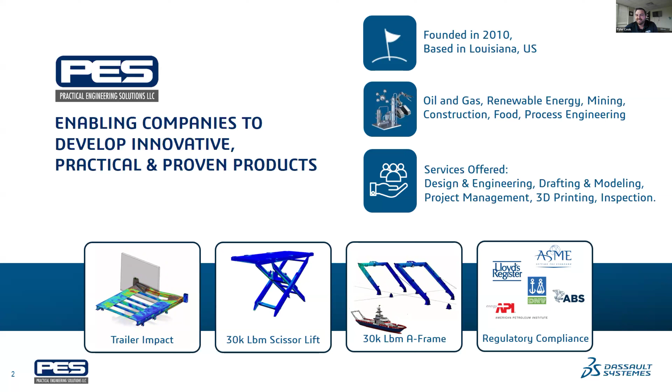Pretty excited to talk about those that are on the screen right now. Maybe we can take a step back and tell us about the history of PES. How did you guys start? How did you grow the business?

This company was founded by our founder, Clayton George. He's a PE as well, really we're 100% focused in the oil and gas industry. Clayton has a ton of experience doing basket design, pressure vessels, portable accommodation modules as well, a lot of stuff that's really big in the oil and gas space. As his company started to grow, he needed to come out with new ways of making sure everything was getting done when they needed to.

So you'll see there, we have a proprietary automated workflow system that we use. It helps all of our project managers stay up to date on their projects, the team understands when their deliveries are, and it really did kind of shape this company into what it is today. This company really is built on clear communication, and if we can communicate clearly internally and create tools that communicate externally to our clients, we've found a lot of success in just really clear and concise communication.

I started here in 2020, so in one of the worst economic years to date. I worked at Stonewall Engineering, another consulting firm, and we were competing against PES. In 2020, both companies were in the same situation—a lot of the oil field work dried up just like everything else, and so both companies were in an adapt or die scenario. That's a little bit dramatic, but that's the reality of where we were back then.

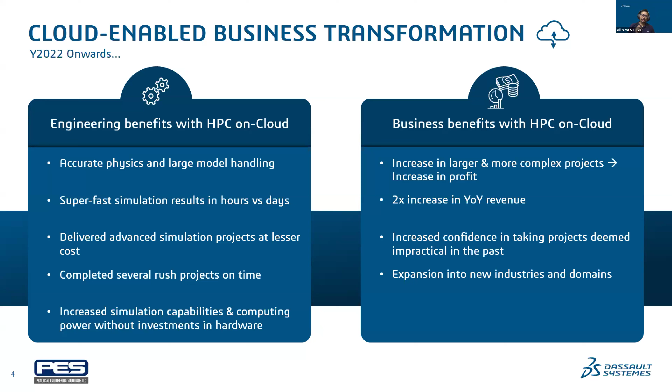I want to take a step back when we're talking about 3D Experience Works. Just out of curiosity, why did you go with 3D Experience Works from Dassault Systèmes when there are so many other standalone simulation tools out in the market, which are really good, by the way? I mean, they're very good at what they do. What made you and PES choose Dassault Systèmes, choose 3D Experience Works for the step up in your simulation journey?

Yeah, it's a really good question. I've used some of those other standalone simulation vendors in the past, and they're great. The physics is fine, there's nothing wrong there. But I've had issues in the past linking a model that our designers are using, and then you move it into the model space.

Sometimes you've got to export it as a step file, and then if I need to make changes, now I've got to communicate with my designer. We've got to make some changes, and I've got to go through that whole process again, remesh, and it's starting from scratch every time I want to do an iteration on my analysis. So really what I was looking for was something that was a lot more seamless. I didn't have to restart and go through this whole process every time I wanted to mesh my simulation model. I wanted to be able to make design changes on the fly.

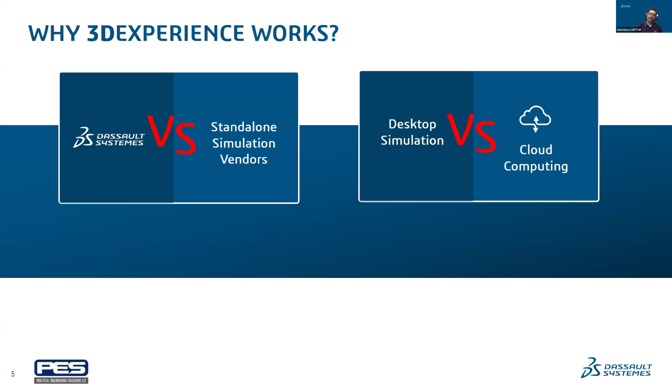Okay, moving on. Another important question we get from hardcore SolidWorks fans is, SolidWorks has PDM, product data management, which they're very comfortable with and love. Now the platform introduces the concept of PLM. The most common question is, how do you deal with managing data both on SolidWorks and on the platform? How different is PDM versus PLM, and do you run into disruption in your workflows because you've now introduced a product lifecycle management based environment into a product data management based environment?

Yeah, so I've been using PDM. On one of my first jobs out of school we had PDM, and I love it because it saved me several times on projects. Checking in and checking out, that's where it's at. You can go back to old stuff and use it. I love the PDM product. When we brought on the platform, it has a similar system to what you mentioned.

We really use PDM as our file management, and the use of the PLM on the platform does not in any way cause any issues on our design workflow process. I use the PLM feature whenever I'm doing some engineering cycles, I'll use it a little bit there. But really, I prefer to keep all of our data in the PDM system because that's what our designers have direct access to. I can give my designers direct access to the PLM, but we really only have one to two seats per year, depending on how busy of a year it is. So we keep everything in PDM - that's where we house everything, our drawings, PDFs, client documents, everything goes into PDM.

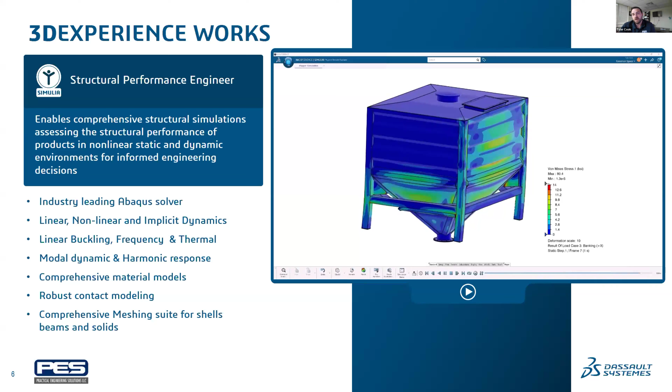And if we do need to buy up and get one of the higher tiers of the program, we can do that and it gets implemented very quickly. That's a good point - we get to stay dynamic in how we operate. So it's the flexibility offered by the cloud licensing model.

Okay, makes sense. Let's dive straight into one of the projects you guys worked on. Tell us a little bit about the project, the challenges, and then we'll go from there to how it was executed. Yeah, now actually I'll share my screen and kind of share what the model of this thing looks like, because just by that picture I'd be explaining and the audience would be a little blind. So let me share this.

If you're designing a trailer and something's going to be on the road, it's not a matter of if it will get hit by something, it's a matter of when. So the client's main concern is if the trailer gets hit, we need to design it to whatever the relevant structural standard is. There's several, it's called CFR, Code of Federal Regulations, that outlines how you design a trailer for rear impacts.

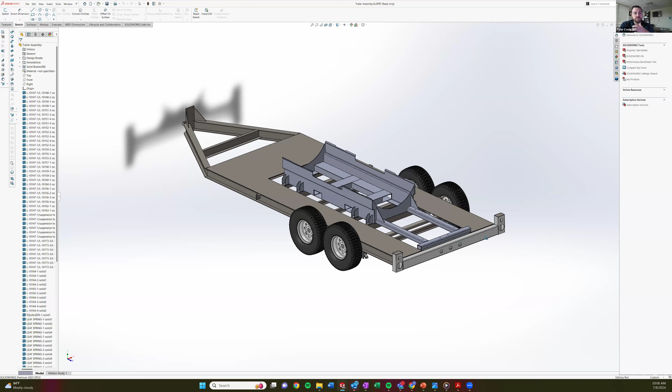What the client really wanted to know is how far this bumper, or this rear beam, would penetrate into the structure if it were hit by a vehicle.

So the downside is, if there is a pretty significant impact, that could lead to the rupture of the tank, releasing toxic material into the atmosphere. Wow, that's scary. Yeah, a lot of times what we're doing can be a bit risky, so that's another reason you want a good solver you can trust and lean on to make sure it's got the physics right.

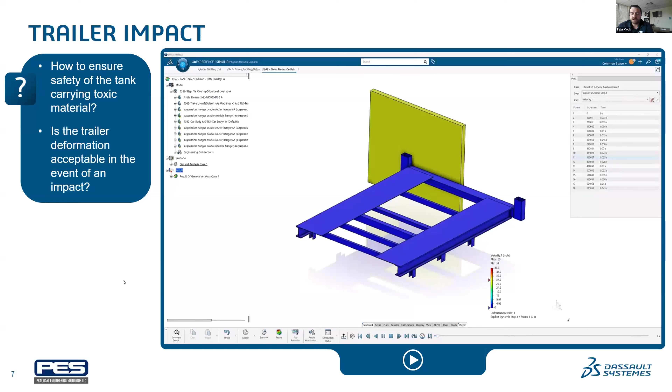The trailer impact happens, you can see it in the image on screen now. It gets hit in the corner, and that's one of the load combinations you have to do. It deflected, I want to say, somewhere around 10 inches in the middle. The client wanted it to be less than a foot, so the design we put in front of them maintained what they were trying to get to.

So they felt confident. The vehicle, the big block in the back, is traveling at 35 miles an hour when it hits the trailer. Oh wow, so it's moving pretty quick. It's not flying 100 miles an hour, I don't think anything out there would survive that anyway.

But that was also interesting seeing in the simulation result, the timestamp on this is like 0.04 seconds at the end. Yeah, it's such a quick, high-force impact, and there's a lot going on from a physics standpoint. You have very complex contacts, parts actually touching themselves because of the contact, and very high deformation that it's experiencing.

So is the end goal to ensure that the deformation the trailer experiences is within the acceptable safe limit, preventing any rupture of the cylinder? That's correct. Okay, and some of the assumptions in this, the trailer is not allowed to move in what's actually the X direction, or the longitudinal direction.

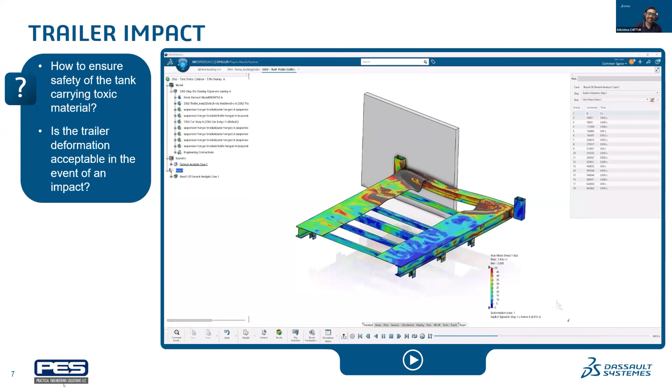We engineers like to see things break, crash. Yeah, we do.

Tell us a little bit about how this impacted client and PES as an organization. The client was actually a bit behind on this, they needed to get this project done pretty quickly. Definitely the structural analysis side of it was an adder for them. I said we can do it if you'd like to see it. They said absolutely, so we added a little bit to our quote to do this analysis. But they really needed to get this trailer registered by the Department of Transportation in their area.

They were up in Michigan, I believe. They needed to get it through DOT approval so they could get it on the road and start mass producing these trailers. They were pretty far behind, and we were able to help them accomplish that goal. And for us, we acquired a new client.

They're really happy with the work we did, so we do expect to have some recurring business with them. It's about time I make a follow-up phone call. We're always trying to add to our business, get new people, new clients, new industries. This was definitely a new industry and a new client for us, so we're really happy with it.

That's a huge business impact. Being able to deliver these kinds of projects, which you couldn't in the past, has probably added a lot more customers with a similar situation. Yes sir, definitely.

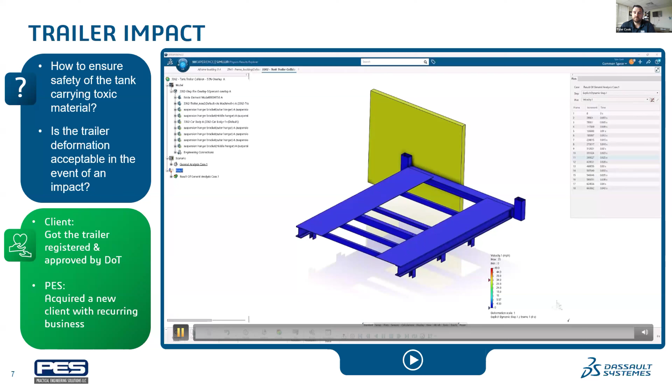Let's move on and talk about another very interesting project you've worked on, which is the 30,000 pound mass scissor lift. Maybe if you have an image or video just for us to understand the scale of this thing.

Yeah, so just dimensionally, I've got a video I can show in a second. It's 20 feet long, about 9 foot wide, and it gets up to 10 foot tall. It's a very, very expensive piece of equipment that performs a very serious role for this client's application.

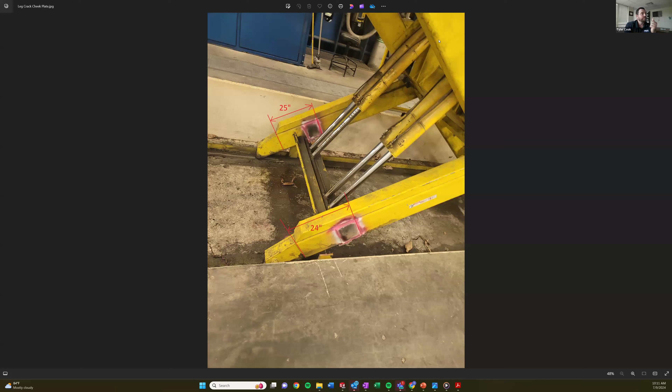What was happening was they were seeing some fractures down at the base, near where those links are shown - they're actually cylinders. Let me share my screen so you guys get a better view of what it does. You should be able to see this area where our client has welded on some plates. They were seeing some fracturing right here and didn't really know what was causing it. So what they needed us to do was perform a structural analysis to see if there were any significant stress risers in this area.

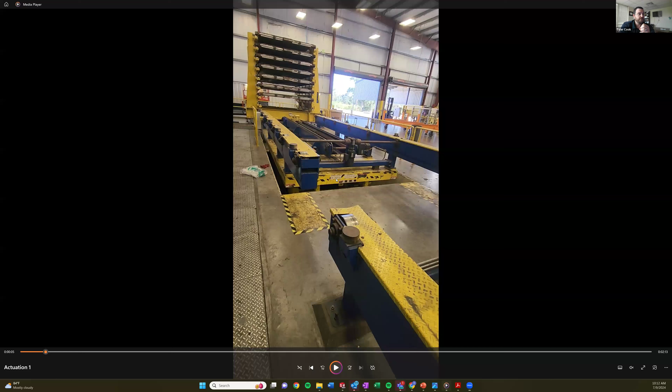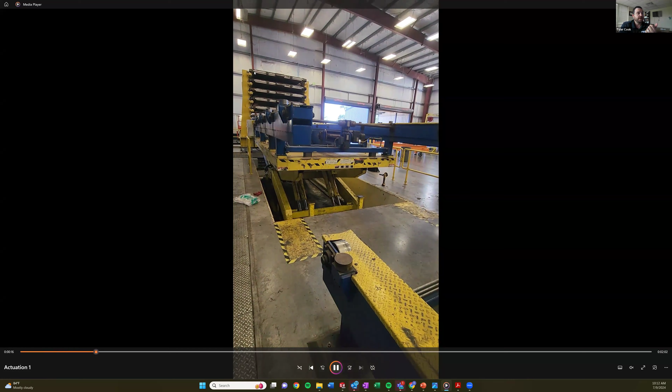This is kind of a zoomed out version, but let me show you the video of this system operating. It actually sits underneath the floor, and it picks up - this transfer system is really what it does. It takes a big tray off of this structure, and that tray gets onto here, and then it's an assembly line, so it moves it to another area.

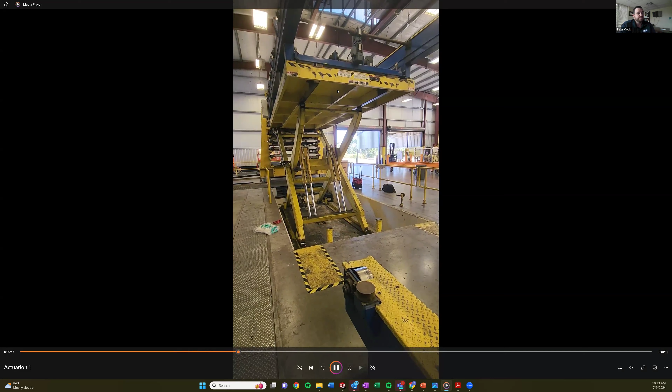But the scissor lift's cylinders extend, pushing up the table to go and grab these trays. This is kind of what it does, and it's pretty massive - pretty huge. The total weight of everything, the tray and the system on top of the table, inclusive of the scissor lift itself, weighs about 30,000 pounds. It's a very heavy, serious piece of equipment. Let me pause this - I think we're about to start walking around the shop.

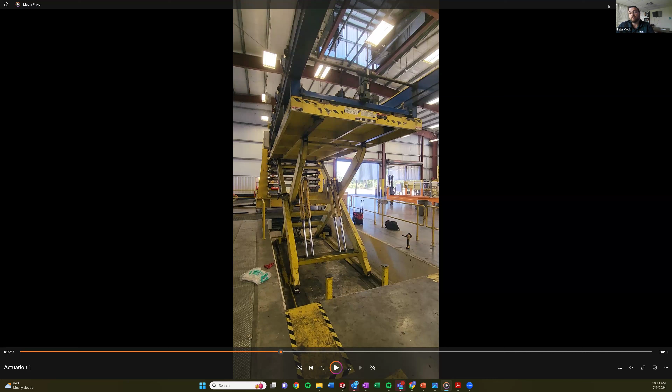It as before, but we did have to add some structure to where the cylinders tie in. They were getting beat up pretty bad. Each one of those cylinders puts out about 37,000 pounds of force to raise and lower this system. So we added some structure there, and then we added some other things in some other areas just to help.

It really is a fatigue issue. This plant runs 24 hours a day, almost 365 days a year, so it sees a lot of fatigue. So anything we could do to relieve some of the stresses in those areas where the failures were occurring was what we were doing.

I can imagine cloud would probably help big time in cases like this, just in terms of the turnaround time for these kind of projects, because it's not that you set up a simulation, you run it, and you're done. It's an iterative approach where you're trying to figure out the right setup, the right materials, and getting the right results. Is it fair to say that cloud was helpful in cases like this?

Absolutely, because we had to go through it. We also had to as-built this. We didn't have any drawings of this system, so we had to go out and measure everything, build it from scratch in SolidWorks, and then run the analysis. You know, it was quite a task.

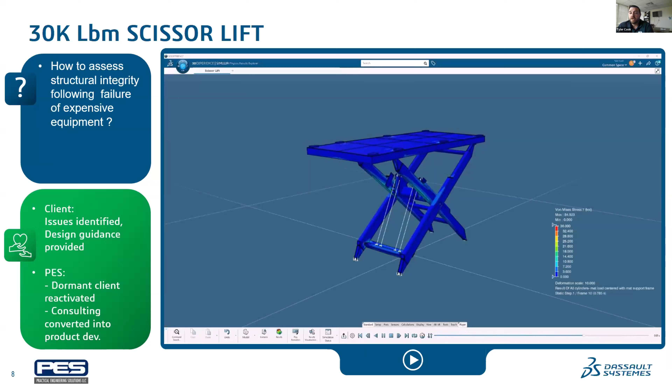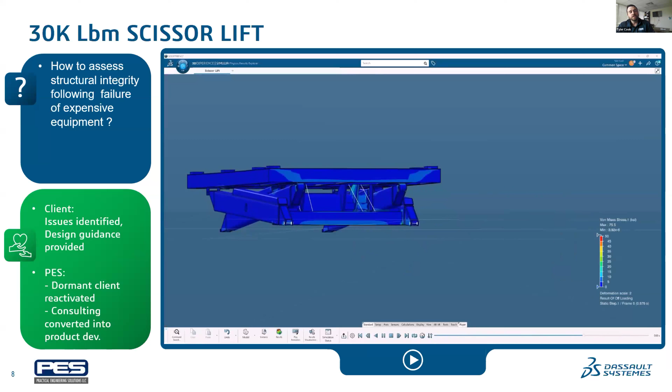Yeah, so they had been actually repairing this structure several times and replacing the cylinders, and downtime in this shop is not good. You know, the products that they are producing, they sell them almost as soon as they're done manufacturing them—they're out the door. It is an oil field application. I won't go into really what they do, but this structure being down is a big problem for this facility.

So it started out, hey, let's assess the structure, let's see what's going on, maybe we can make some temporary modifications to help us get through until our next turnaround. Well, what ended up happening is they had some issues—it's a bigger company, it's harder to get people on your vendor list.

So what ended up happening is we have fab shops that we work with daily. They send us work, we send them work, we manage some of the construction jobs. So this ended up turning from a dormant client that we hadn't done work with in several years—we had lost all our contacts there—into needing to get back in the door. We were able to do that.

We were able to give them the confidence that we can do good engineering work. And we mentioned to him, hey, if you need us to build one of these for you, we have some fabricators we work with that we can use. And so currently, actually, I got the revised quote back today. So I think potentially this week we're sending our quote out to this client, and we have a potential that we're going to project manage the build on this piece of equipment and then manage the installation as well.

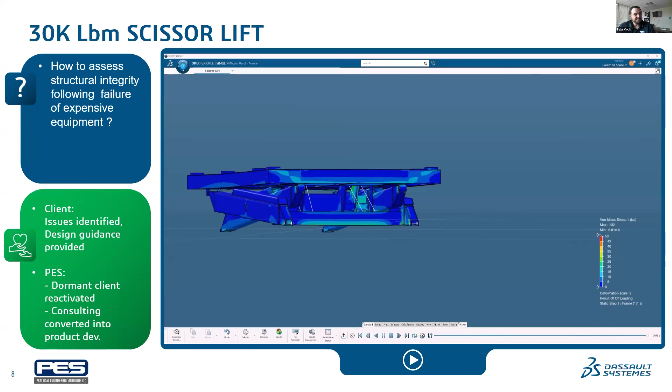All right, moving on, let's talk about the last example project that you worked on, which is another 30,000 pound mass A-frame. Tell us a little bit about this one. So 30,000 pound mass is actually the load that this system is rated to pick up.

The entirety of the weight of this system is around 60,000 pounds, and then you add that 30,000 pound load on it, so now you're actually at 90. So it's rated to pick up 30,000 pounds. General dimensions of this thing are, it's 52 feet 7 inches tall, and then it's approximately 42 feet wide. So it's a very, very large structure picking up a very heavy object.

And we had some very interesting requirements, this had to be done to ABS standard. The client wanted some extra load cases run. He wanted to know what would happen if a single cylinder were pulling on it, or if hydraulics went down on one of the cylinders, and he wanted to make sure the structure was safe under that loading scenario.

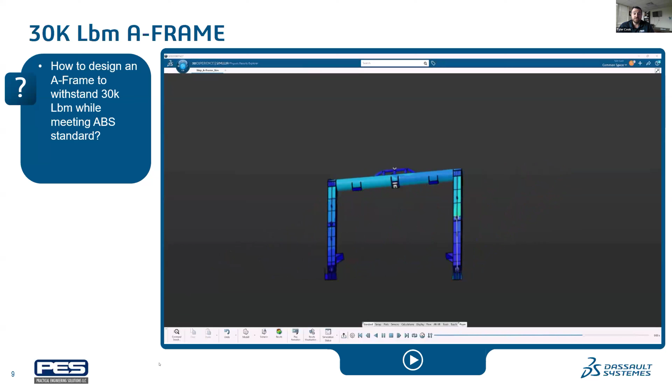And so you get a lot of big deformations. Again, it's a very complex piece of equipment to mesh. It has to be run in several configurations. So the solver as a whole...

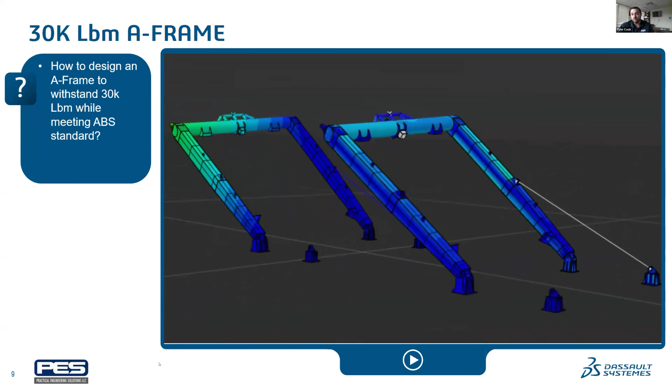...gives us the ability to do what's called an assembly of meshes, and we're going to talk about it a little bit more later. But I can mesh this system once and run it in each one of those configurations, and I don't have to go back and remesh it. That's a huge advantage for us.

This is very complex. I know it doesn't probably look complex from the outside, but there's a lot of structure going on inside of those legs that we had to mesh, and we had to make sure it was contacting correctly. It was quite an undertaking, a big job that needed to get done quickly.

They've installed it, and they'll be load testing soon. So it's a pretty big one. It's massive. I've stood next to it a couple times, and the images you see here don't really do it justice. It's pretty crazy.

Just out of curiosity, how long do these simulations take to run on cloud? The ones with 2 cylinders can run anywhere from an hour to 2 hours. When I have the single cylinder load cases, sometimes those would get over 3 to 4 hours. Like I said, it's a massive structure.

I have a really fine mesh on it. It has some really interesting spots where the stress will start to develop, and so it took a lot of mesh refinement and doing some different things in Abaqus that I definitely, from a meshing standpoint, wouldn't have wanted to do for all the configurations we had to run and all the different sims. You can duplicate sims, you can do a bunch of different things, and the platform really does make your life easier when it comes to that meshing and meshing controls.

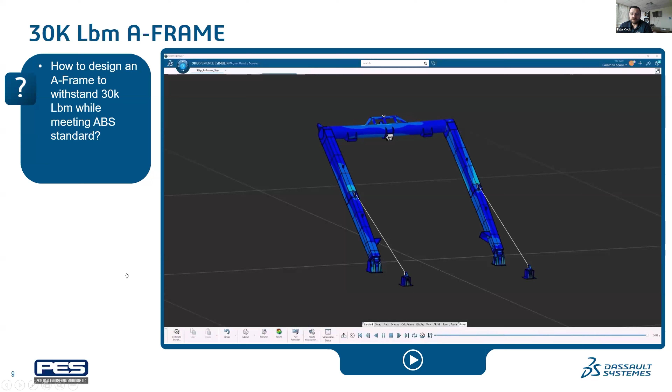It's a big structure, and it's impressive. It's massive. And like I said, without the solver, we probably would have had to turn down this project, because I don't know that we could have got it done in any of the other softwares that we use, or if we could have, I don't know if I would have trusted them as much as I trust the solver.

That's good to hear. Tell us about the impact of this project on the client and on your organization.

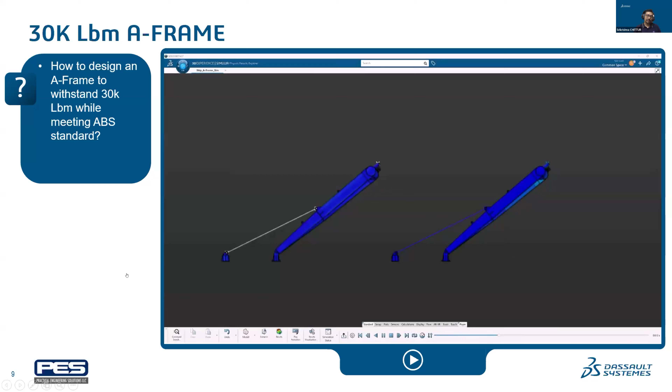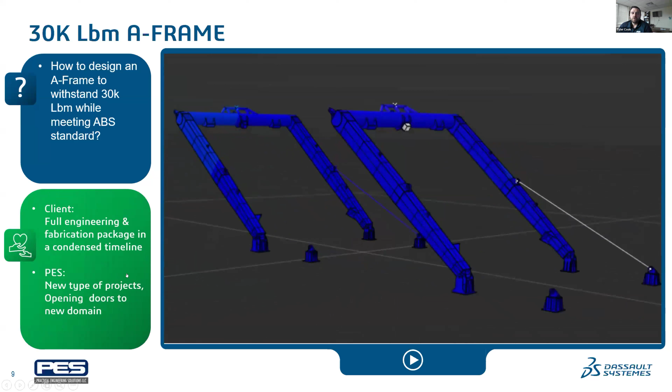Yeah, so we did the full design on this. There was no as-built. Client had a similar project before and shared some stuff with us, but we had to go through it ourselves. We spec'd out all the sheaves, we spec'd out the fair lead, that's in the middle right there. It's not extremely complex, but the way the wire rope wraps around this thing so that you can pick up the object.

And large cylinders. Had to go and spec out those cylinders, sent to the client. We had certain extensions that it had to get to, it had to go outboard so many feet, at different angles. So we had to go through and figure out, make sure that the cylinders could get there, check all the loading on the cylinders. You have issues with cylinders buckling. So there was a ton of different design aspects that we had to take into account during the design work on this thing.

And again, like I said, inside of those legs, there's a lot of structure in there. So drafting had to do all the drawings, fabrication drawings on it. And for the client, they needed that done quickly, of course.

And it kind of continued to open up doors for us in that industry. This is a marine industry project, so we got to work with a boat manufacturer, or the people modifying the boat or the ship, however you want to call it, that this is going on. And it led to another project, and we've constantly been able to expand our business using this solver. So now you've added another realm of expertise as the service, allowing you to penetrate a different industry. That's impressive. Yes, sir.

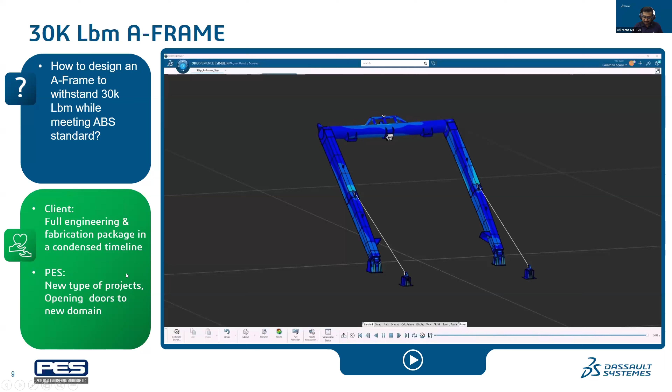Okay, we are almost near the edge of the hour. Let's quickly talk about your top 3 favorite capabilities in 3D Experience.

Yeah, so high performance computing on the cloud. As I said before, I'm our operations manager here. I have to look and make decisions from a financial standpoint. And so, when we decided to purchase the software, we really didn't have computers, and we kind of still don't today, that could run these simulations.

So I have to weigh the cost of, say, okay, if I go with someone else that I don't have cloud computing opportunity with, I may have to upgrade all of my machinery. I may have to buy another server to run these load cases on. There's a lot of, then I got to get my IT company to come in and do all that install, and that costs money, and the dollars start racking up, right?

Right. And this also, it was not a one-time deal, right? You have to keep maintaining the equipment. I have to maintain it, and as the software upgrades, I got to do upgrades on my server, and it just becomes a long, drawn out process through the life cycle of running this business.

Right. What this cloud computing did for us is I made a phone call, I had to write a check, right? Again, very well priced, I thought at the time, especially for the project that we were taking on with it. And we got it implemented within a couple days, got our logins, got straight into running and working through the issues on the solver. I didn't have to buy anything, I didn't have to wait for components to come in, I didn't have to wait to schedule something with my IT department.

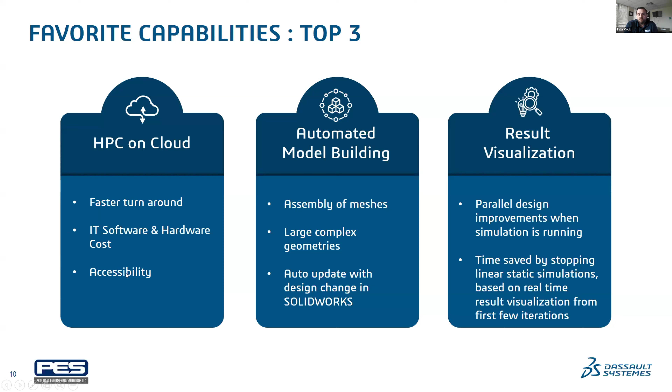So what's interesting is when we made these slides, we didn't have a CFD project. Now I've got 2 CFD projects going on right now, so we're getting into more fluid simulations. We're always looking to expand into other industries, and we want to be as diverse as we can be. We also want to expand into other projects in our current industry that we've talked about quite frequently throughout this webinar. But in terms of globally where we want to go, we've got about 15 employees here now.

We want to get up to 30 employees. Whenever we get up to 30, we can start talking about sectioning out some divisions. With that increased, doubled team size, we're also expecting to increase our revenue by at least 2 times. When we do that, we can continue to grow, maybe get some different divisions, and start really focusing on certain people whose skill sets are really good at certain things. Let them focus on what they're good at and keep expanding their client list.

That's really what the PES system is about. It's about bringing in people who have this entrepreneurial spirit - they want to be an entrepreneur, they want to start their own engineering firm or design firm, but they don't want to deal with the overhead. That's really what our system does for the people who buy into it and take off.